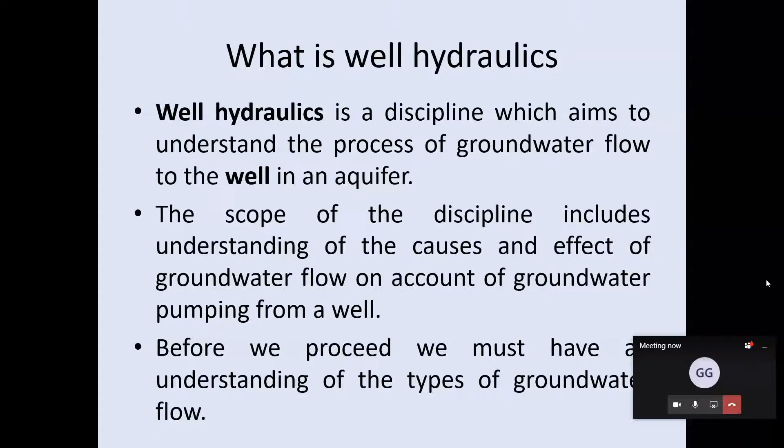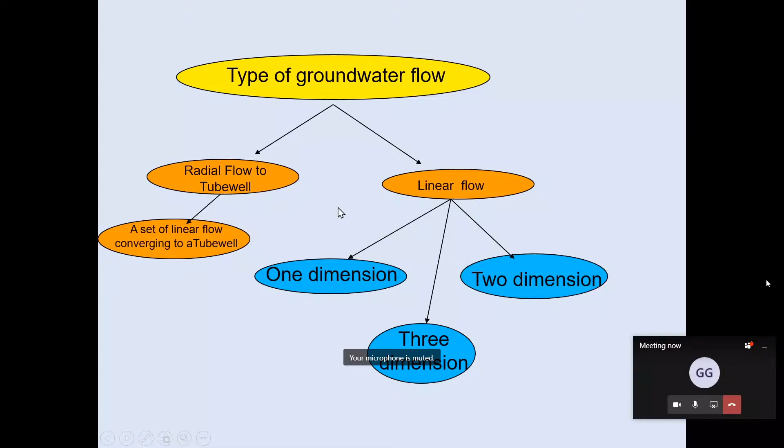But when you pump a tube well, this water was flowing like this, left to right. Then suddenly you have created a point stress here. So what happens? Water from all sides locally converges to this point, and that is radial flow, a series of linear flows converging to a point.

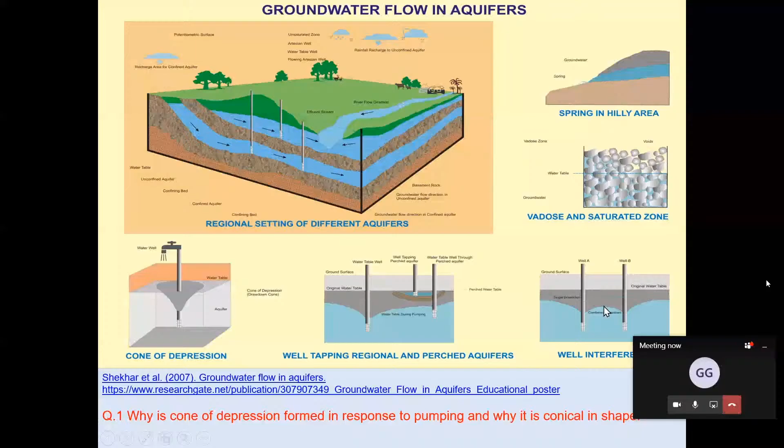So let's move ahead. All of you must be aware that you have mainly two types of aquifer: confined, unconfined. There can be leaky, semi-confined. Now I must clarify in the beginning that it's two different systems. The hydraulics is different, the well hydraulics is different, the flow regimes are different, the physics is different. Most of us goof up many times by clubbing the two together, so we must be very careful.

This is a confined system where you have an impermeable strata. This is a closed system locally, meaning a drop of rain which falls here does not go into this aquifer here. It is recharged somewhere in a far off area where it ceases to be confined.

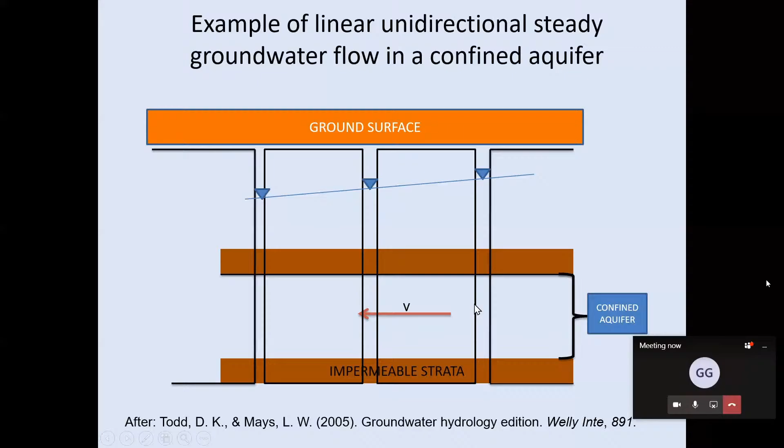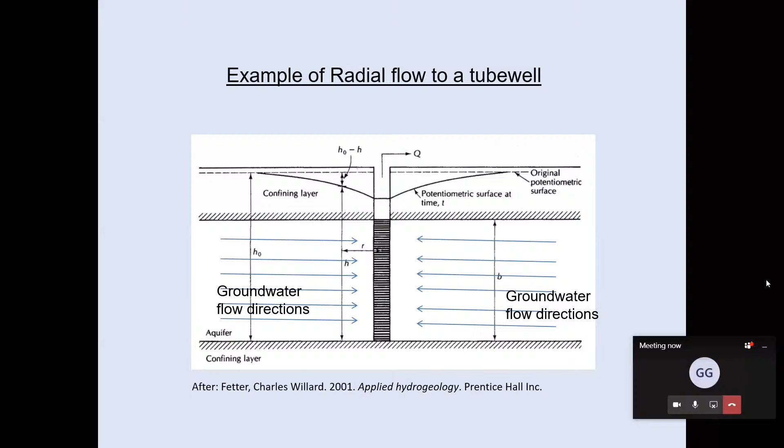And so now you will appreciate that the hydraulics of confined and unconfined aquifer is totally different. The flow regimes are different, and the hydraulics is different. So let's move ahead.

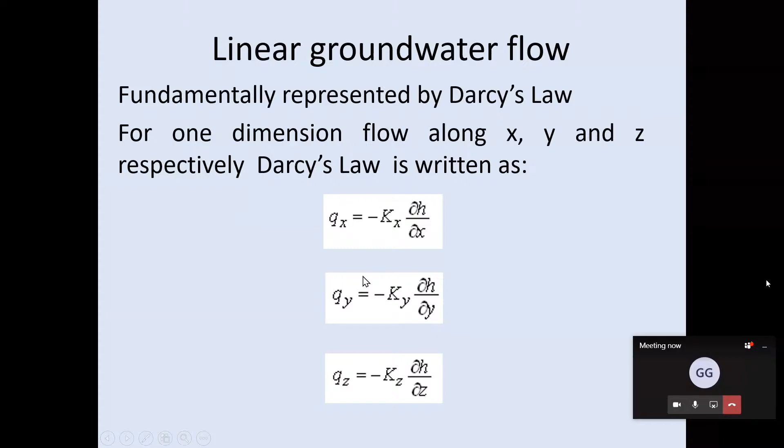This is very simple, this is Darcy's law, where it says that the flux, that is Q upon A, is hydraulic conductivity. This is along x direction, so it is Kx multiplied by hydraulic gradient. I don't know how, by writing such a simple equation, Darcy became so famous. It's an empirical relationship. I wish someday we will also do something like that and give a fundamental equation in science. But anyway, we all use this. So this is x along x, y along y, z along z.

Now, if you read this heading, it says a steady unidirectional flow in a confined aquifer. I have not defined what is steady. Somehow the sequencing puts it later, but we will introduce it right now and then discuss in detail later on.

Look, any flow regime, any state always endeavors for a steady state low energy condition. Why is groundwater flowing? Look at my mouse. Why it is flowing from right to left? Because it always wants to reach an equilibrium condition. And that's nature's endeavor. That's a human endeavor too. All of us always want to reach a steady condition, whether it may be in a relationship with your girlfriend or in a family, everywhere you want to reach a steady state condition.

Now, in a groundwater flow regime, the steady state condition is reached when recharge equals to discharge. Now, you will ask me how it is physically manifested. How the hell I know when recharge equals to discharge? Who is going to compute this? Okay, you need not compute this.

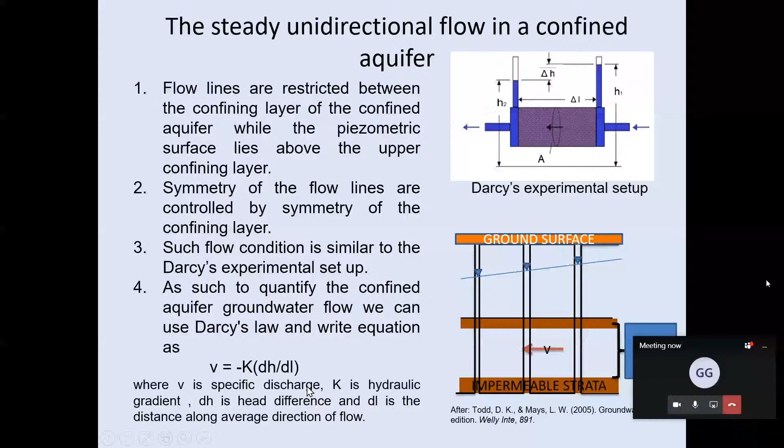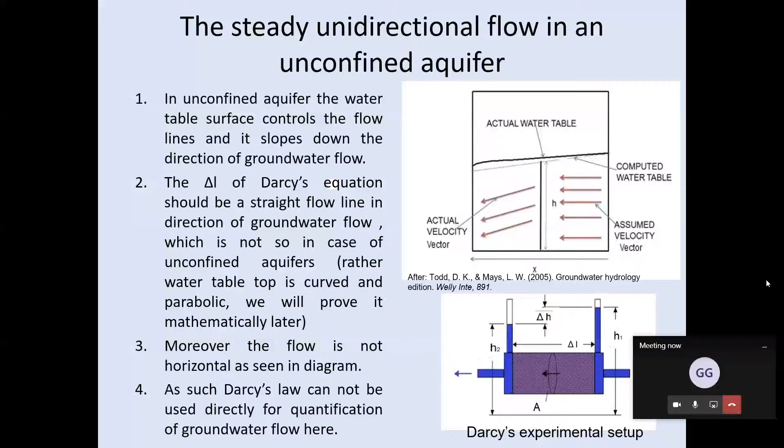And so finally, if this is not analogous to this, can I use Darcy's law in unconfined aquifer? No, not allowed. I have to think. How do we use that? That is where Dupuit's assumption comes.

Many of you might have done your post-graduation in hydrogeology. I also did a major in hydrogeology, worked in Central Groundwater Board for 8 years, and I could really understand Dupuit's assumption only when I started teaching hydrogeology. That's an honest confession. Teaching is the biggest learning process. When I was asked to teach Dupuit's assumption, I started reading it again, and then I could understand it better. Many professionals say they are not clear on this. So let's look at it carefully.

Dupuit's assumption is nothing much. He just wanted to facilitate use of Darcy's law in unconfined aquifer. Because Darcy's law is a very simple and universal law, and Dupuit saw a merit in making some small assumptions and then using Darcy's law to quantify groundwater flow in unconfined aquifer.

And what was Dupuit's assumption? He said, hang on, why are you breaking your head? First of all, if I estimate the groundwater slope from Bihar to Kolkata, it will be 1 degree, not more than that under normal flow condition, or maybe 2 degrees. Groundwater slopes are very, very less, within 5 or 6 degrees, except in the vicinity of a pumping tube well.

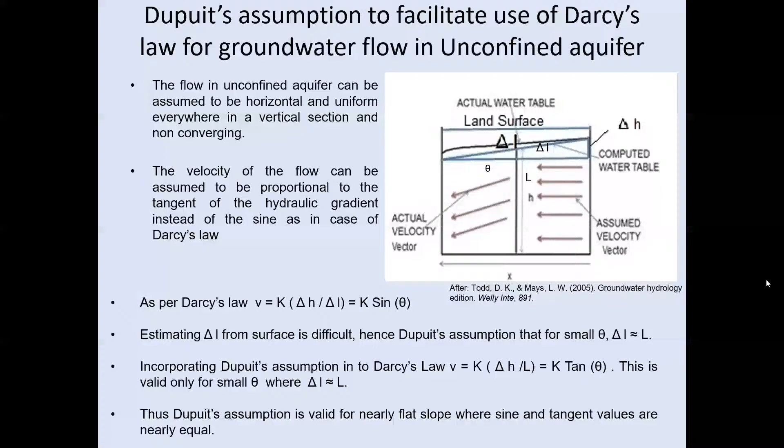But later on, in a steady state condition, we will be using this Darcy law. And then I will answer why we are using this. So with Dupuit's assumption, we can quantify flow in unconfined aquifer using Darcy's law. I hope you are convinced.

Now look at this drawing which we have used. This is a vertical section. So in 3 dimensions, it is something like this. So this is a unit width. So discharge from here per unit width, let us say Qw, as per Darcy's law, it will be minus K into h.

Why h? Because here h is the height, and this is 1. So h into 1, area is this into this. So this dimension is 1. So K into A, instead of A, it becomes h. And dh upon dx is variation in h along x direction.

So if that is fine, let's come to the next slide and say I rearrange it: q into dx equals minus K h dh. It's a very small integral. Anybody who has done class 12 can do this. I have not put the integration sign because it was difficult to put in this PowerPoint. So if you put an integration sign here and here, integration of h is h square upon 2, and integration of dx is x.

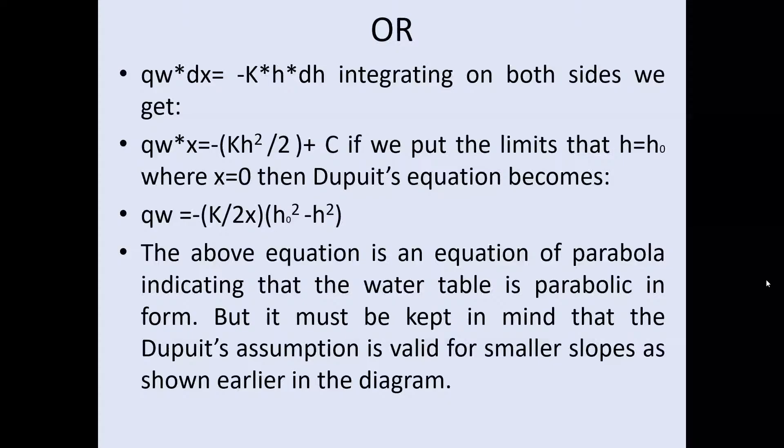And then using the same Darcy law, with which we were not able to quantify groundwater flow, we made some assumptions and did a basic quantification, and we have proven that the water table top is not a straight line. It is parabolic. And every time we assume it to be a straight line.

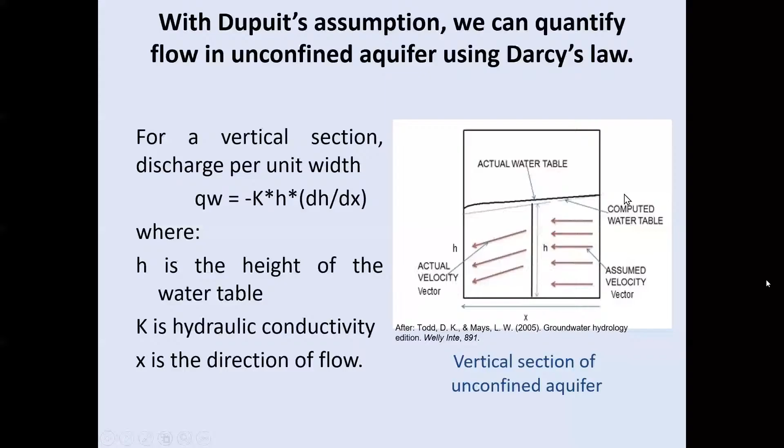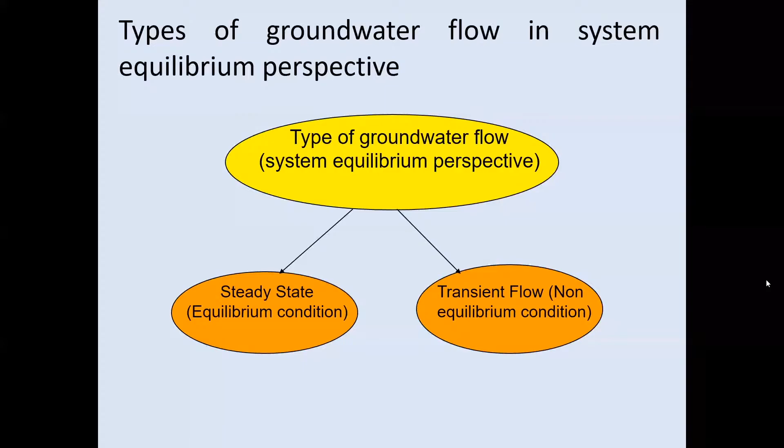So now, in a system equilibrium perspective, you can have steady state, an equilibrium condition, or transient flow, a non-equilibrium condition. What is steady state groundwater flow? It refers to a flow condition when the magnitude and direction of specific discharge, which is nothing but Darcy velocity, remains constant with time. Why does it happen? Because there is no addition or withdrawal from the aquifer storage, and equilibrium has been reached between recharge and discharge.

And how is it manifested? It is manifested by the position of the potentiometric surface and the hydraulic gradient, which remain unchanged. In a nutshell, when input and output from the aquifer reach an equilibrium condition, the water head does not change, and that is a steady state condition.

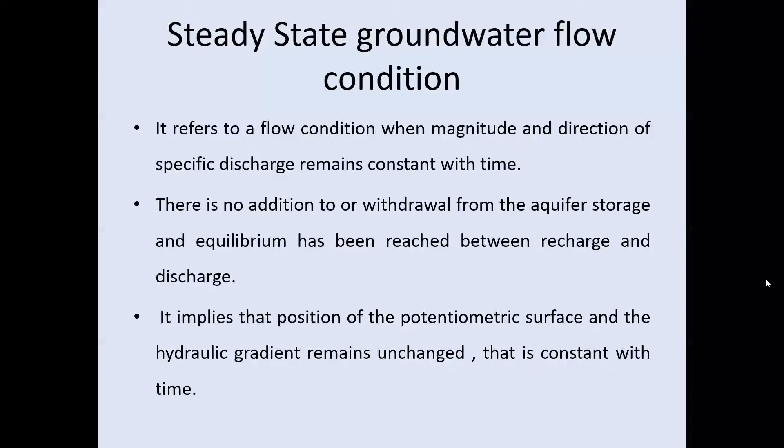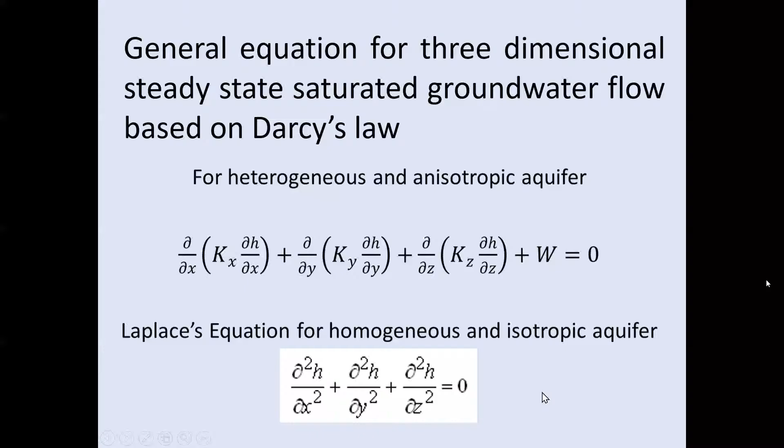So now what is a transient condition? Transient is unlike a steady state. It refers to a flow condition where the magnitude or direction of specific discharge changes with time, meaning the velocity changes with time. Then it involves change in storage, meaning the aquifer has not reached an equilibrium condition.

The recharge is not able to cope up with the discharge maybe, and so water level is declining in one condition, and in another maybe recharge is more than discharge and the water level is rising. So things like that. And the best manifestation is that the piezometric surface or the water table is not constant with time.

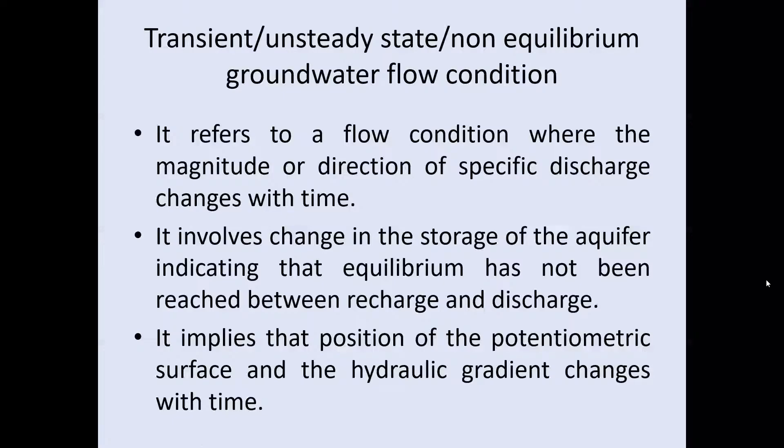Yeah, many of you might be a research scholar, and your life condition is very similar to that of a transient flow, non-equilibrium flow, where it keeps changing with time and with your struggle to get a job and get a publication.

So this was the general equation, where on right hand side in a steady state condition you had 0, because this h in a steady state condition becomes constant, and so this becomes 0. Don't break your head on this, because I put this because I do groundwater modeling and these equations fascinate me. But yes, at a master's level you are supposed to know this.

Okay, so radial flow to a tube well. What makes sense to us at the end of the day is that my tube well should give potable drinking water and in sufficient volume to suffice my needs. Now I have already defined radial flow of a tube well refers to groundwater flow condition where they flow from all sides. They are nothing but a set of linear flows.

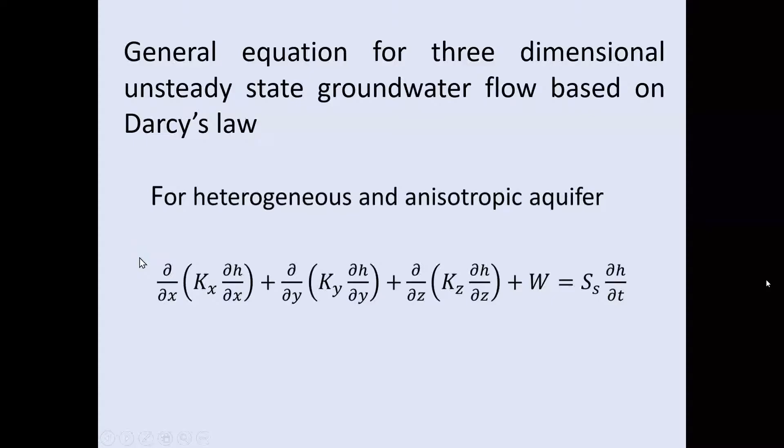There are many mathematical equations which quantify radial flow, but they have big assumptions. And we must know that this radial flow is best quantified using this equation. But using this equation is very tough. And so we will go to some analytical models or simpler equations and try to understand the groundwater flow.

So for a radial flow to a tube well, you have steady state and transient. These are the scientists, Thiem, who derived the equation for confined aquifer, and so he got his name. Then Dupuit, who derived the equation for unconfined aquifer, and then this is one of the, after Darcy's law, one equation which is most widely used.

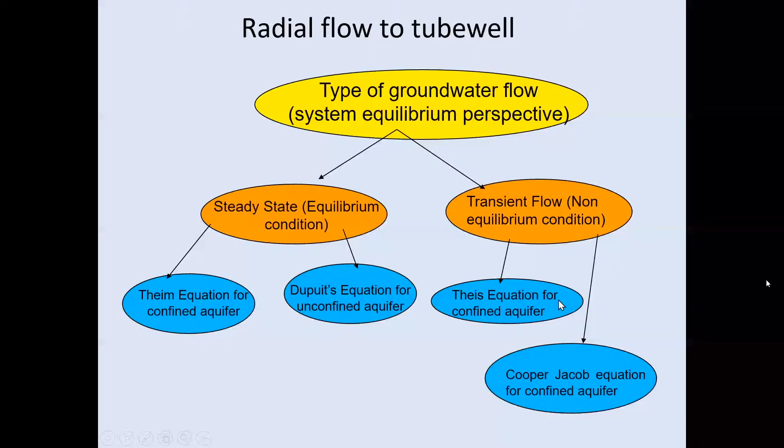So now this drawing has been taken from Todd's book, and I have made a few additions like static water level, pumping water level, and saturated thickness, things like that. Now look at this. This is a pumping tube well, and these are two observation wells.

Water is being extracted from here. Nothing is being extracted from here. They have been just made to monitor the piezometric heads. They are observation stations. But here water is being pumped. Now before we go, we must know that when you pump a tube well, the maximum extent to which its cone of depression goes, this is radius of influence.

It is like those tigers in a jungle, each tiger has a defined territory, and each dada of a muhalla has a defined territory. So each pumping tube well has a defined territory at a given discharge. So this is the radius of influence of this tube well. The other side is like this, but it would be too big to make it here.

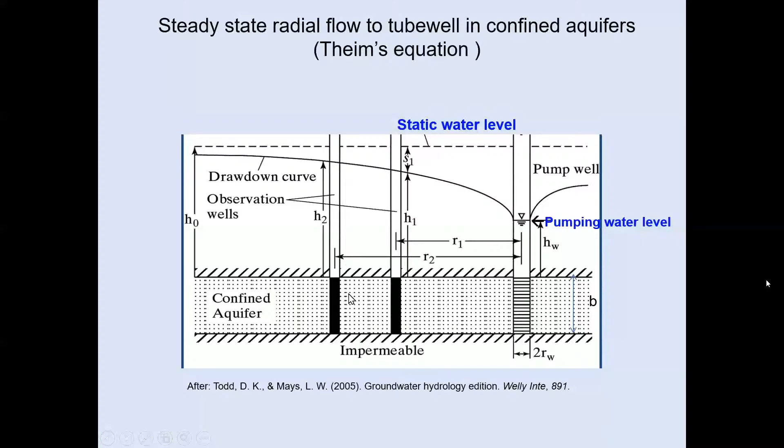Now, when I want to know what is the curved surface area through which groundwater is flowing, then it is 2 pi Rw B. At this distance, 2 pi R1 B. At this distance, 2 pi R2 B. Because then, as per Darcy's law, Q is K A dH upon dl. That is hydraulic conductivity into area into hydraulic gradient.

Why I was worried about this 2 pi RL and 2 pi RB, because I wanted to know this area through which groundwater is flowing. So for sure I know that in this confined aquifer case, this area is 2 pi RB. And K is an aquifer parameter. This dH upon dl here will be dH upon dr, because r is the radial distance. Now let's see what I have written. Yeah, that's curved surface area of cylinder. Okay.

Another important thing I must introduce here is that this L of the curved surface area, which is your B, is constant in a confined aquifer, because no matter how much water you keep extracting, as long as it is confined, the saturated thickness remains constant, and so this B remains constant. But this is not the case for an unconfined aquifer. Later on you will see that introduces one more variable.

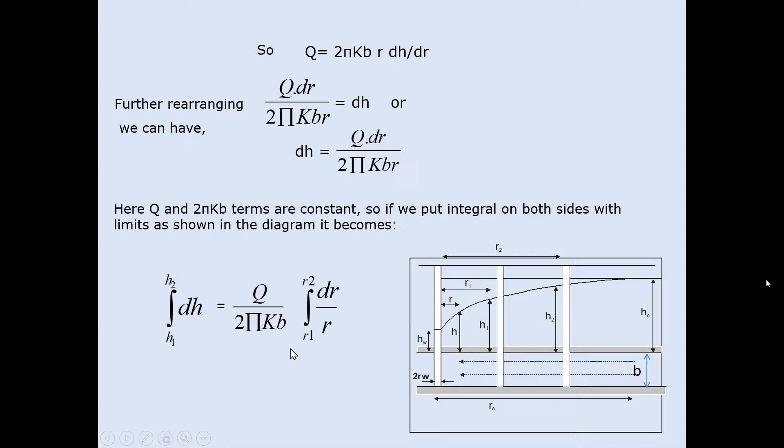And so it is basically integration of 1 upon R dr and dh. Integration of 1 upon R is ln R, the natural log of R, and integration of dh is h. So if you put the limits as h2 minus h1, ultimately you get the Thiem equation for a confined aquifer under a steady state flow condition.

Now, I wonder if I had some genius student sitting in my class, not the one who fears to ask a question. Your questions give me a kick. He should have first asked: Sir, why have you skipped the minus sign of Darcy law here? In Darcy law, most of the time we say Q equals minus K A dH upon dl. Who gave you authority to skip this minus? I must explain, because my students have asked this in class, and then we opened books and discussed.

Okay, look at this. What does Darcy law say? That groundwater flows in the direction of decreasing head. So if initial head is 2 meters and final head is 1 meter, you measure head like this and distance like this. That's why you have a minus sign, because H2 minus H1 is always negative. But in a tube well flow regime, the way you are measuring is different.

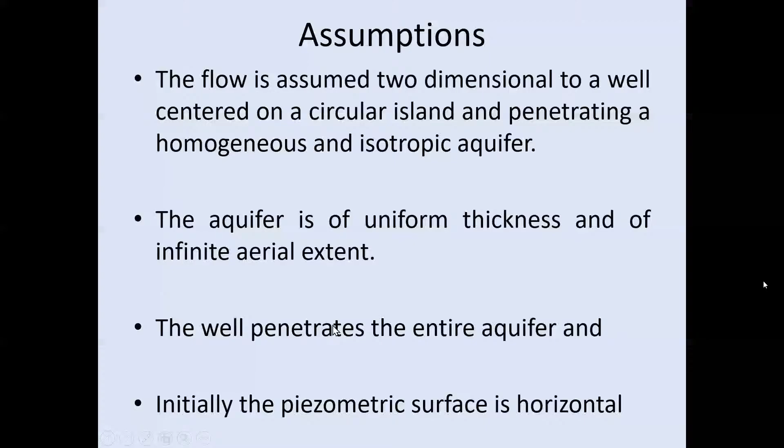And when it has become variable, it will have to be integrated. So we can write Darcy's law as Q equals K times 2 pi R H dH upon dr, where 2 pi RH is the curved surface area of a cylinder and H is variable. We rearrange it as 2 pi K R H dH upon dr. Then you put Q upon - because Q is constant, 2 is constant, pi is constant, K is constant - as dr upon R and H dH on the other side, then you integrate.

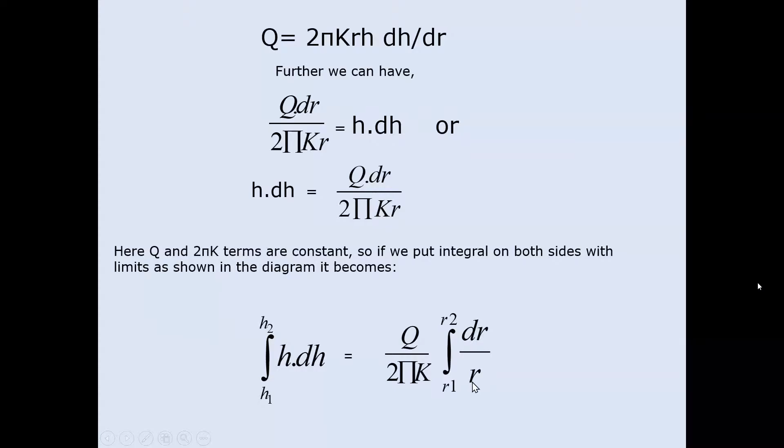It gives a different equation: the integration of H is H squared upon 2, so if you apply limits H2 and H1, it becomes H2 squared minus H1 squared. Likewise, the integration of 1 by R is log of R, and you ultimately get this equation, which is Dupuit's equation. The point is that the well hydraulics of confined and unconfined aquifers are totally different.

This is because the confined aquifer is a closed system where the water level head does not change with respect to pumping, and the saturated thickness remains constant. In an unconfined system, it's an open system where the saturated thickness changes with the water table.

And that makes two different pressure systems where the flow regimes have subtle differences. Most of the time as a hydrogeologist, we mess up with the two and try to use one equation for the other. Yes, there are ways, but with an assumption, not directly.

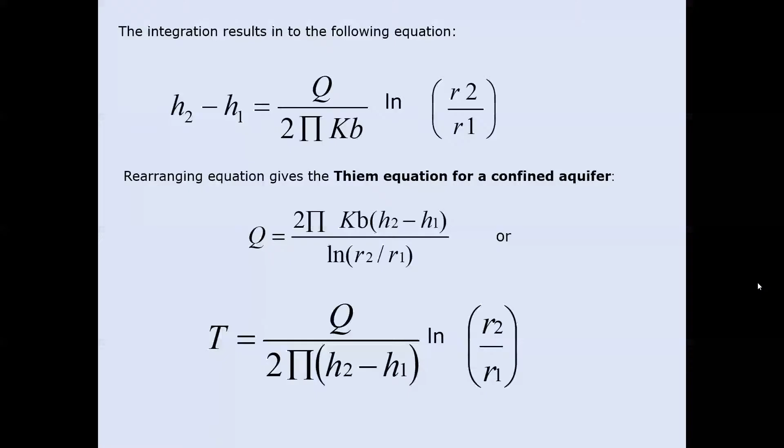Before that, I must introduce partial penetration, so the students will have this inquisitiveness. I think I can use this, or maybe, no, this is a better one.

First, Darcy's law is valid for laminar flow. There are many questions on this - I will not open the Pandora's box right now. I wrote one of my first papers on this, but still this will violate the laminar flow of Darcy's law.

Second, whenever water takes a longer path like this, there will be a head loss because it has to fight the resistance of the aquifer. So this head loss here will be more, and likewise. So you will not get a true assessment of the aquifer response.

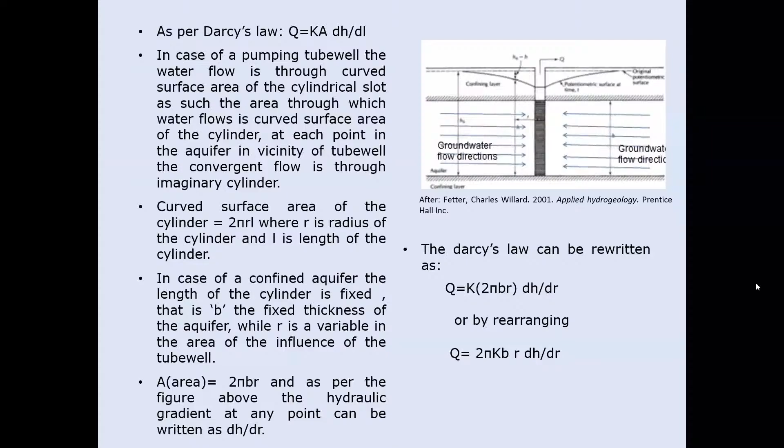And thus, when you are doing any testing or something like that, you must have full penetration. Before I go to the non-equilibrium condition, I must speak a few things about pumping tests and then come to this.

So what is a pumping test? Pumping test is nothing but a routine groundwater exploration exercise to estimate the aquifer and to estimate its parameters.

So what do we do? We make a borehole, a test borehole, an exploratory borehole, like a tube well. We make it in earth, then we pump this out. The moment we pump this out, we develop this into a yielding tube well.

After we do this, we want to know the parameters of this aquifer - its transmissivity, its hydraulic conductivity, its storativity if this is a confined aquifer. We want to estimate that because it helps in further quantification of the groundwater flow regime if you are aiming to attempt that. And so before any pumping test, we do a well performance test.

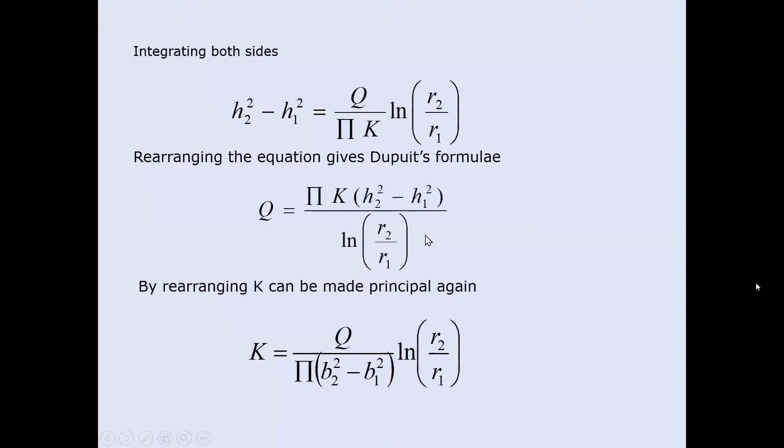But there is a limitation of a steady state pumping test with a steady state condition.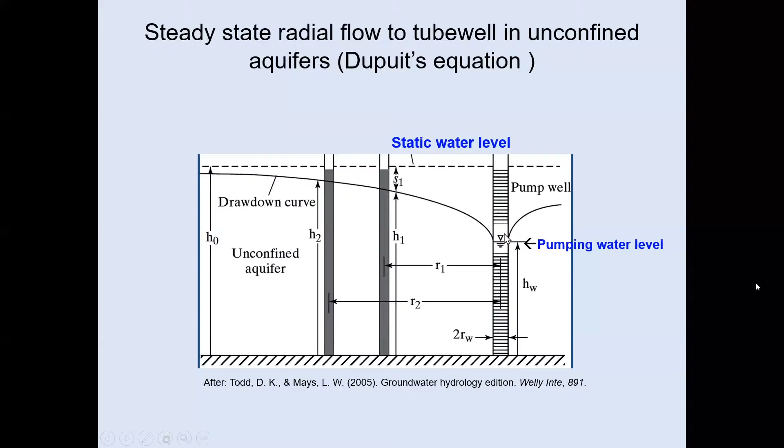Your equation does not have a storage parameter. That is why, if you want to estimate the storage parameter, you must have transient data before this condition was reached. In unconfined aquifers, this is a totally different story, but in confined aquifers, you can use that.

Before we go to transient or unsteady state flow in a confined aquifer, I must say the steady state condition was easiest to derive mathematically. The flow regime was simplest to understand because it was a steady state and the piezometric head had stabilized. We could quantify it because in a steady state condition, this piezometric head was not changing.

But in a transient condition, every minute this diagram changes. It becomes like this, then after two hours it becomes like this, and like this, or maybe like this. So to quantify a system which is changing regularly is tough, and for years hydrogeologists were struggling, until a hydrologist, Theis, came out with an equation which is being widely used.

I must tell a small part of this story. The Theis equation was never written by Theis himself. He was struggling, and then he went to a mathematician friend of his. He knew that heat flows from higher temperature to lower temperature, since he was an engineer. So he said, okay, there is an equation for heat flow, I will use that in the groundwater flow regime. He had this idea, but he never knew how to write the equation.

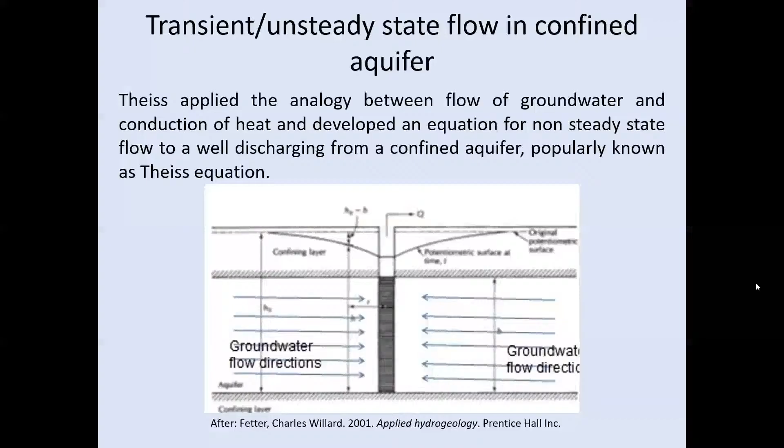So he went to a mathematician friend of his, who wrote an equation like this. Theis, like an old gentleman scientist, went to him and said, okay, you will be my co-author. The mathematician said, hang on, this is very trivial, I won't be co-author, this is all stupid science which I do daily, this is not big science. He refused to be co-author of the paper. It's written in Fetter's book, you can read it. And then Theis wrote that paper as a single author and got credit for this equation.

So with this small background, you should never give up your small contributions, you can become a legend. Theis became a legend, nobody knows that mathematician. Theis wrote an equation where H0 is the initial head, and this is H.

For H0 minus H, that is the head difference, which is a drawdown, the equation is analogous to heat flow. It's Q upon 4 pi T, integrated from U to infinity of E to the minus U upon U, dU, and U is R square S by 4 T t.

Now this looks complex, but it's fairly easy. This Q is the discharge of the tube well. Pi, all of you know. T is the transmissivity of the aquifer.

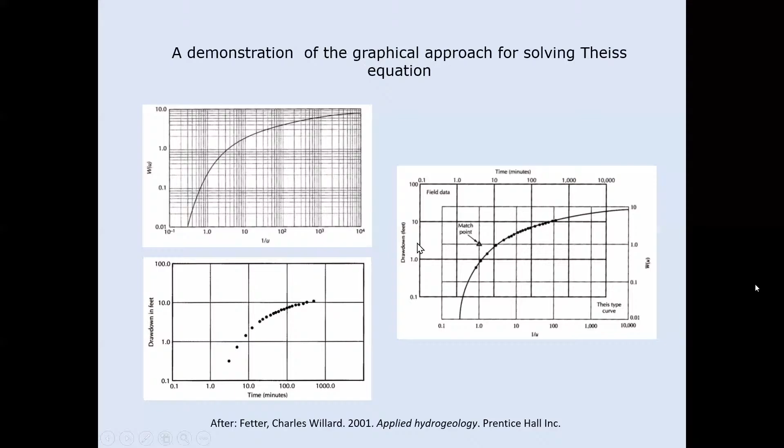Now, this should be on a transparent sheet. I superimpose this on this, and this is what I am doing here. This is from Fetter's book. When I do this superimposition, my endeavor is to bring all these dots on this line. This is called best fit. In this best fit position, I can find four values. My x-axis will give 1 by U and t. For any point you put, you will get 1 by U and t. And on y-axis, you will get s, drawdown, and WU.

No, I think I said go back. So, yeah, you are here.

So from that plot, I know Q, I know 4, I know pi, I got WU value, I got small s, drawdown, so I can estimate transmissivity. And on the same plot, I got t value and 1 by U value, whose reciprocal will be U. I got T, and R is the radial distance, which I have measured in field using a steel tape. So I can estimate S. That's how, from a purpose-built and designed pumping test, I can estimate the aquifer parameters using Theis equation.

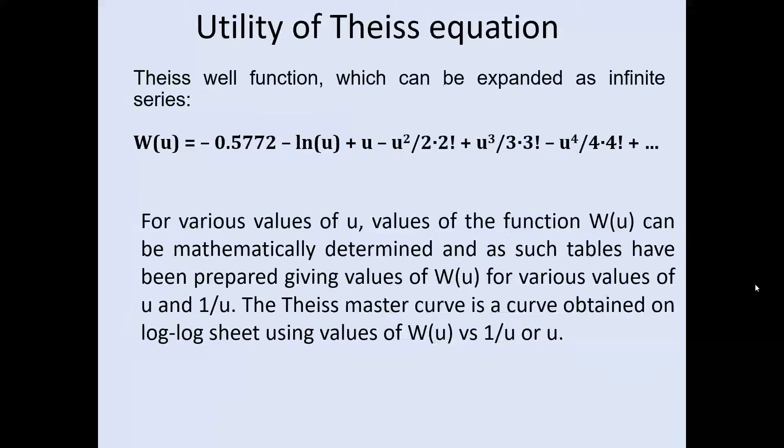Now you will see many reports using Theis for unconfined aquifer.

That's not wrong science. That's not that the hydrogeologist was incompetent, because the Theis method, I have clearly written it, for unsteady flow in a confined aquifer can also be applied to an unconfined aquifer, provided that all the assumptions are the same. And the next is an important assumption, that the drawdown is very small compared to the saturated thickness. Many thousands of iterations were done, and it was found that the results are good.

The young minds must be having a question: why can't you have a separate equation for unconfined? Why do you always want to use Theis? You can have a separate equation for unconfined. Perfect, that's a very valid question if that is in your mind. First, we use Theis because using Theis is very easy. Then you must understand the other equation might be more complex. And the Theis type curve is readily available. There are softwares readily available.

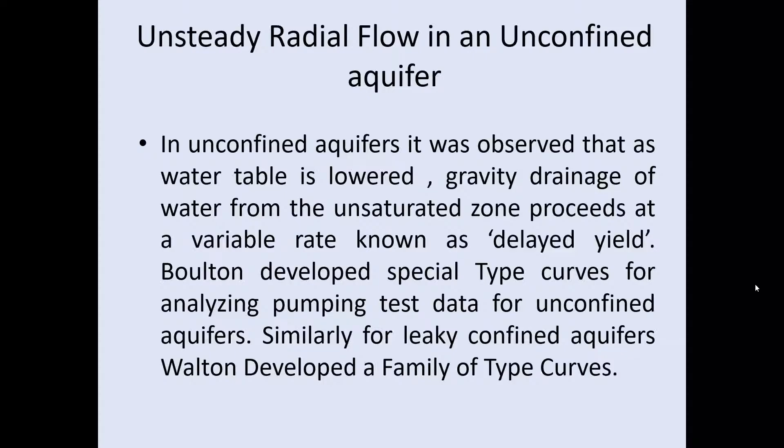It's experiential learning. When we have used unconfined aquifer data for estimation of the aquifer parameters, and I have tried to use the unconfined equations, because they are all analytical models, the results were many times not perfect. But when we have used Theis in segments on unconfined data, the results were realistic. And that's why I have put it purposely here. You can always treat unconfined aquifer data with Boulton, Neuman, and so many other equations. But if your drawdown is small compared to the overall saturated thickness of the aquifer, treat it with Theis, and the results are good.

Now, see, Mukhtar, the moment I say the aquifer is homogeneous and isotropic, I have got rid of two troubles. I need not mathematically estimate K for different parts and K in different direction, or transmissivity in different direction. Because all science starts from simple to complex, not from complex to simple. Let us say you say, oh, but my aquifer is heterogeneous. Okay, fine. First you assume it as homogeneous, then you divide your whole aquifer into different homogeneous units, and estimate for them. Similarly, it is for isotropic.

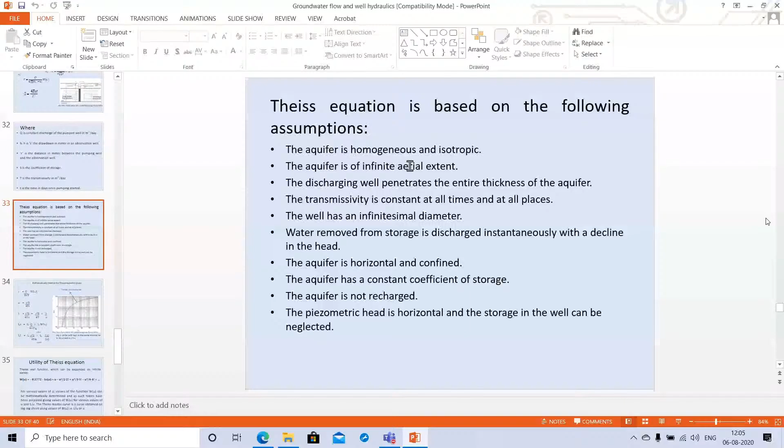Then, the well penetrates the entire thickness. If you don't penetrate the entire thickness, then an additional head loss has to be estimated because of partial penetration. So that increases another load of work. So better you make a well which penetrates the whole aquifer. Then T is constant, because if you make T variable, then you cannot estimate that from this equation.

Then the next one, it has infinitesimal diameter. I think this needs understanding. You might have had a look at a dug well. Now, if you take water out from a dug well, one bucket, then there is no change in head. Why? Because it has a storage. Now, I don't want that when I am doing a pumping test.

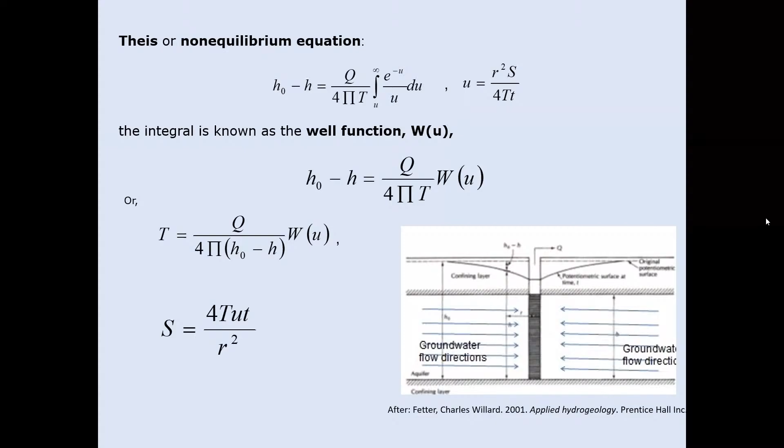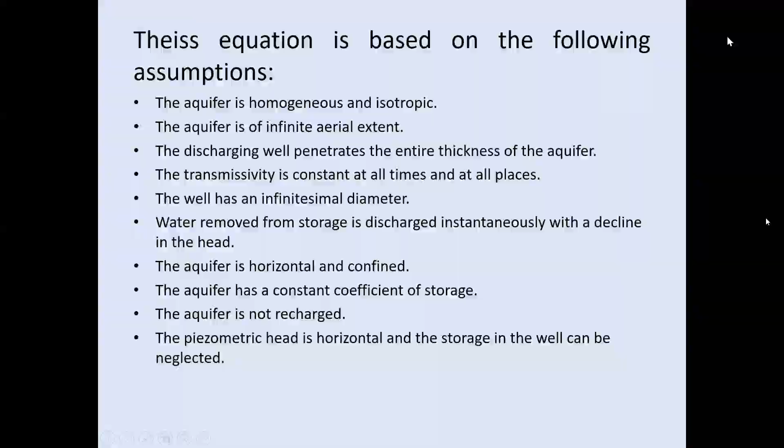Okay, Aditya. Yeah, hello. No, I think. No. Can you hear me now? Aditya. Okay.

Aviroop, see, first of all, in well hydraulics, these equations are for constant density. You assume that the water has a constant density. When the TDS of water changes, that is the salinity changes, then density changes. And as such, sensu stricto, these flow equations will have to be rewritten for a different density. The cause and effect relationship will be different. These are constant density equations. It's a good question.

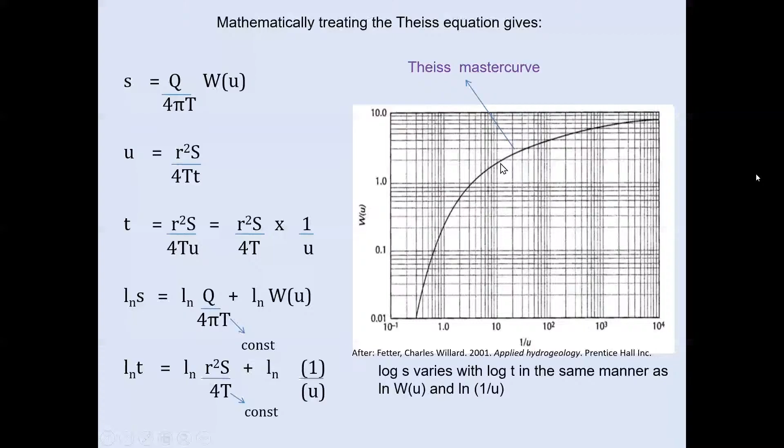Yes, Aditya. Sir, there are still a lot of questions going on. People are more excited. So I'm trying to compile some general questions into a common question. There are different types of terrains and different forms of aquifers. Yesterday we were discussing aquifers and aquifer mapping. So this one question integrates all the smaller questions: how, as hydrogeologists working in different terrains, we can use this data for groundwater resource development as well as for contributing towards societal development. Yeah.

See, why I am in water science is because it has direct societal value. There is a scope of service to humanity. So all water science has direct societal relevance. And I think today it's one of the sought after sciences. Now the question is, when you are working in different terrain, how you use the data for welfare of humanity and society at the local scale, and then how all the fundamental science is used there.